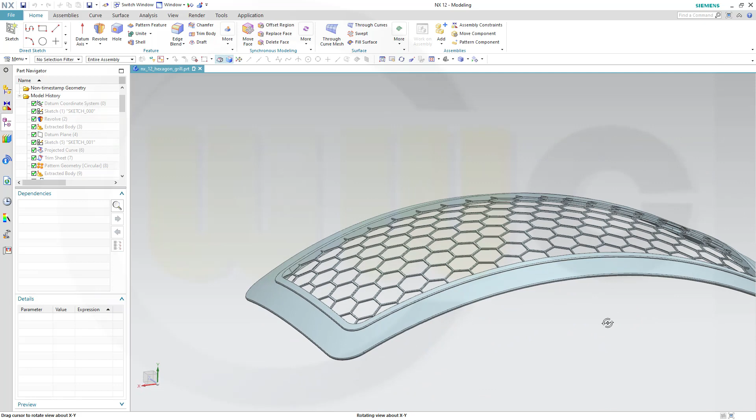I want to do that hexagon grill now in Siemens NX, which went very well, very sort of easy to do. And please note, those hexagons have all the same size, but those ribs between those hexagons are not equally sized, because you cannot cover a sphere with equally sized hexagons. But let's have fun with Siemens NX.

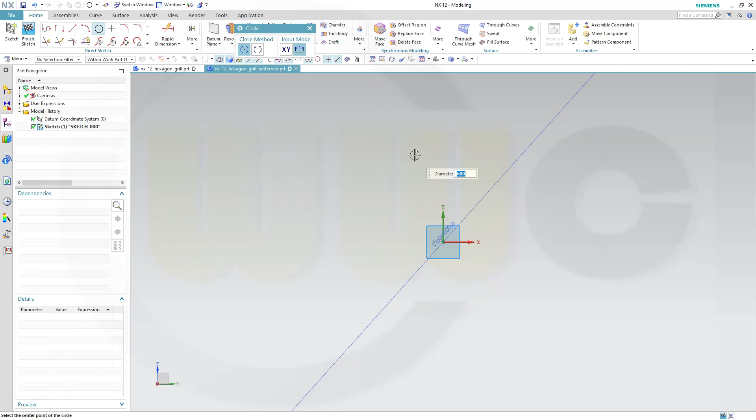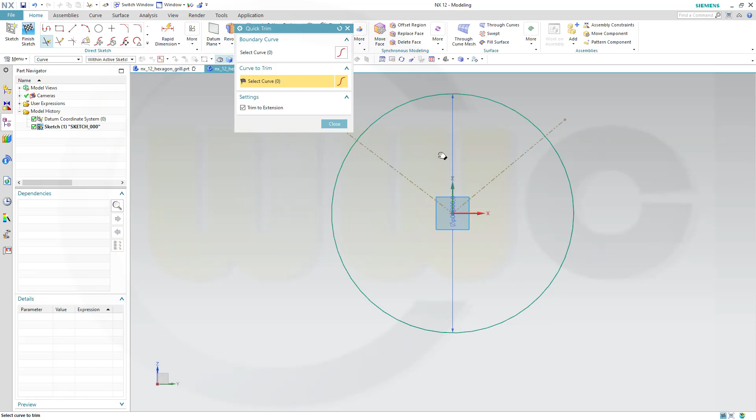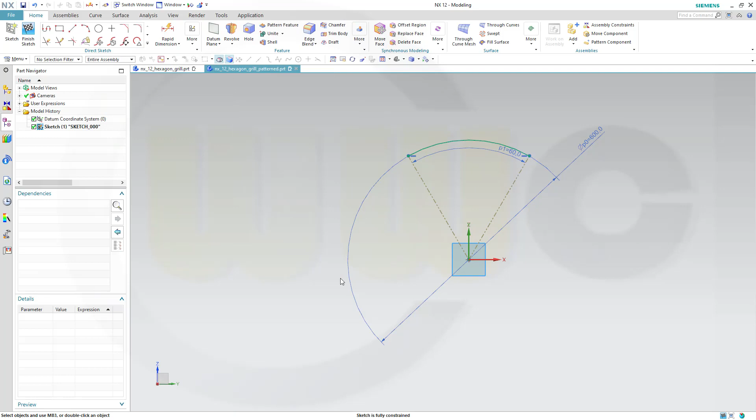Okay, let's start with a sketch on the YZ plane, this one. Okay, I need a circle. Diameter could be 600. And okay, now I need some lines to trim. Okay, make those two for construction only. Trim. Close, arrange those 2 points horizontal and give it a dimension, and that might be, let's say, 60 degrees or 80 degrees, one way or the other.

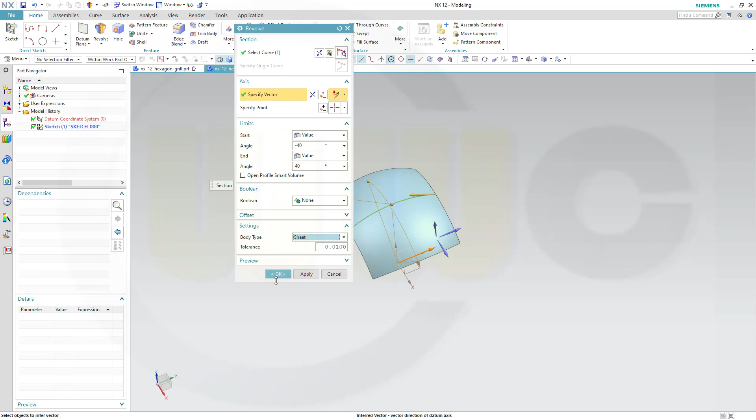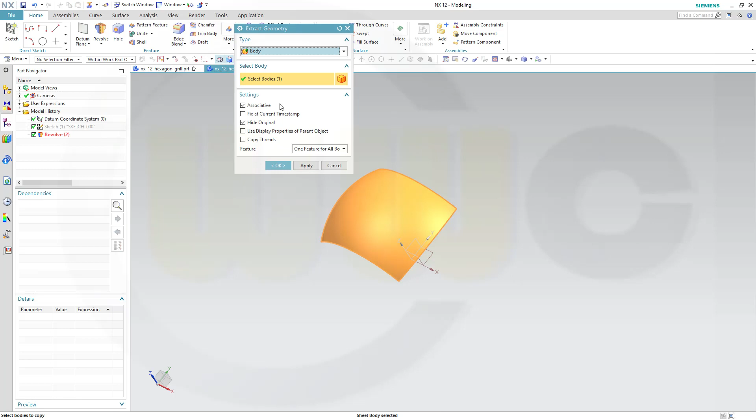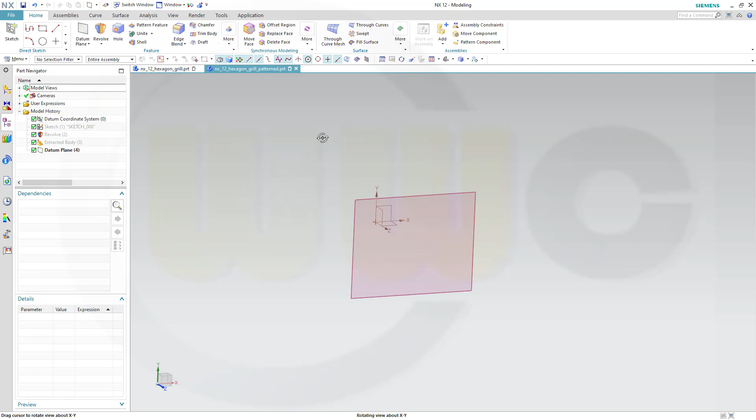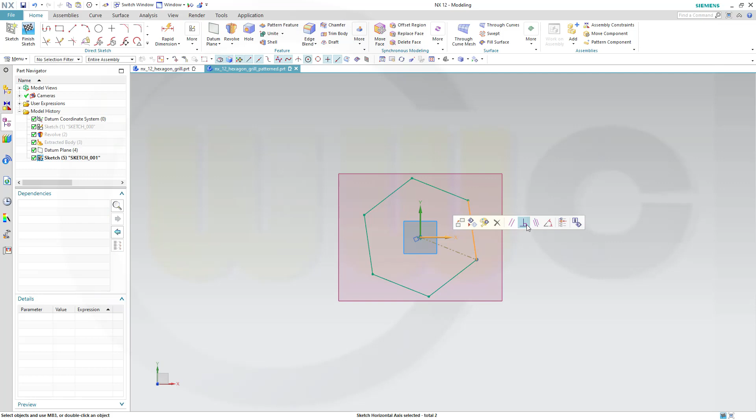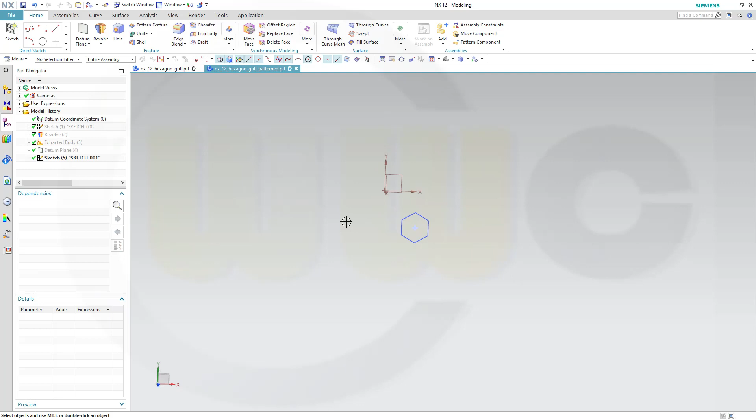Let's go for a sketch, maybe hide that extracted surface for the moment. Go to that plane, confirm. I need a hexagon, maybe like that. Close, arrange that line and that axis perpendicular, and give it a dimension of maybe 10. Close, let's zoom in. Okay. Finish that sketch and hide that plane for the moment. Bring back our extracted surface.

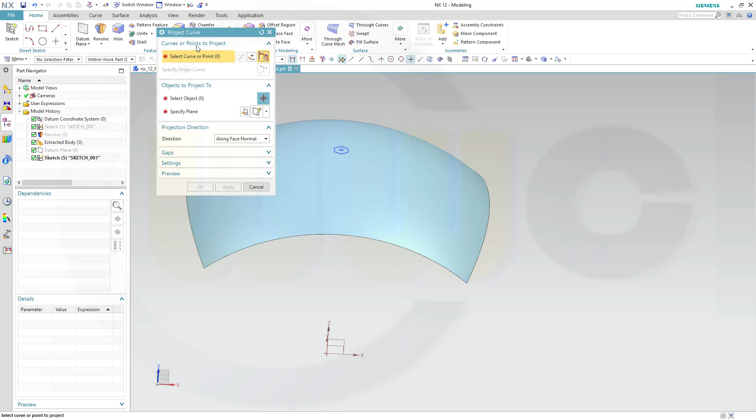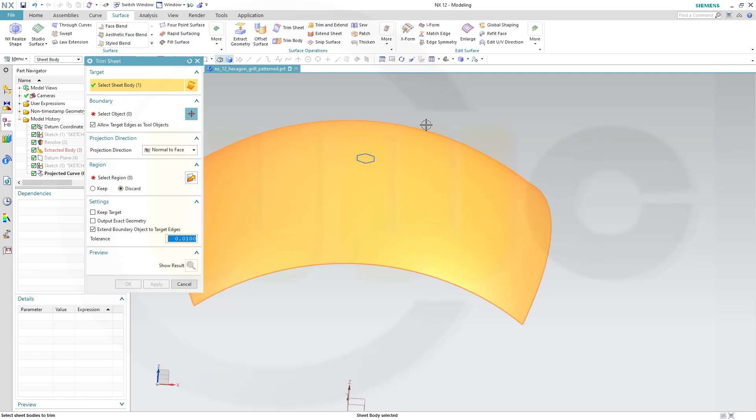Now I want to project this hexagon onto that surface, so go for Menu, Insert, Derived Curve, and I want to project that sketch onto this object along face normal, and OK. Now let's hide the sketch and trim that surface. Go for a trim sheet. I want to remove that, and that's the target, and this is the boundary, and it's discard, so it should work nice. Now I want to pattern this one.

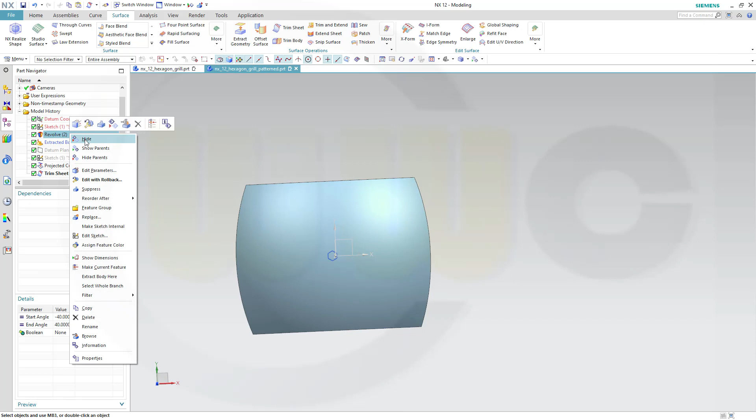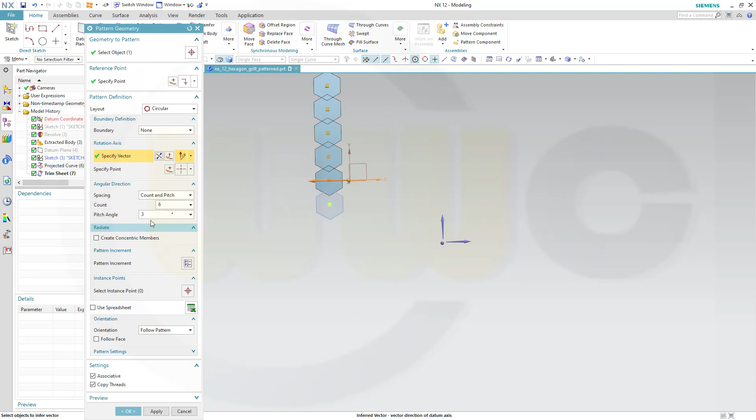Let's bring back our original surface just to see. Yeah, that's okay. Hide. I want to pattern it. So go for Home, More, Pattern Geometry. I want to pattern this geometry around the x-axis. Turn it around. I want to go for 6 and 3 degrees distance, but now I can clock those instances, and that's a great feature.

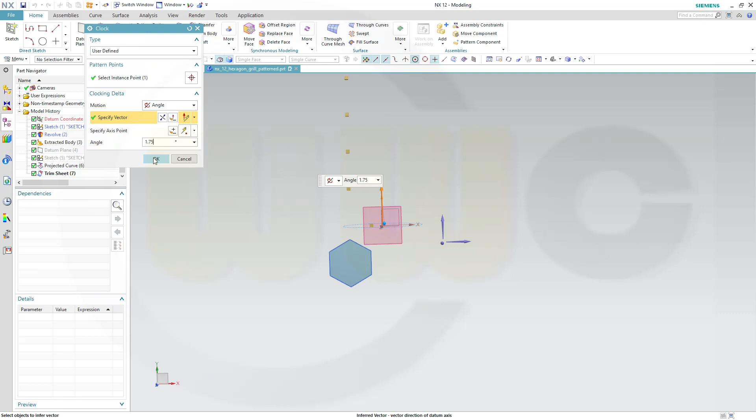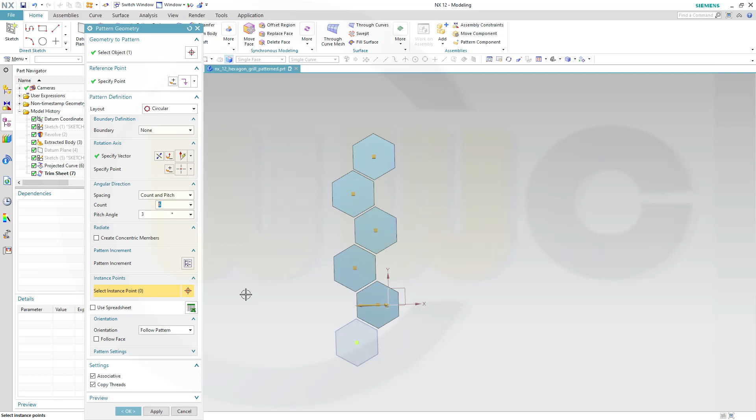User defined, go for an angle around the y-axis and make it 1.75 degrees. Okay, then clock this one again, user defined, again an angle around this axis, again 1.75. Okay, and the last one, clock, user defined, go for an angle, select the axis, again 1.75 degrees, and confirm. That's really nice.

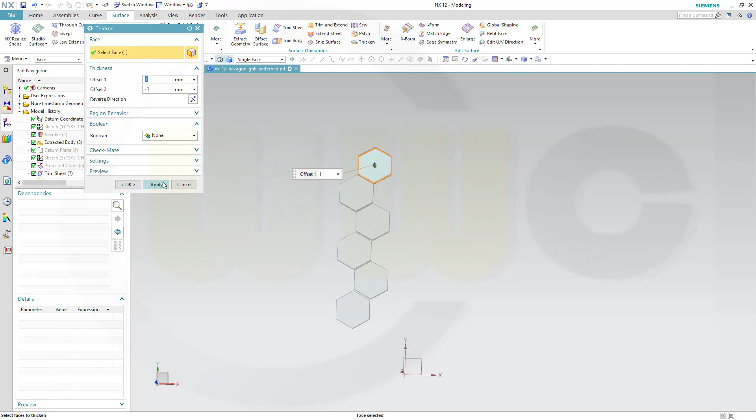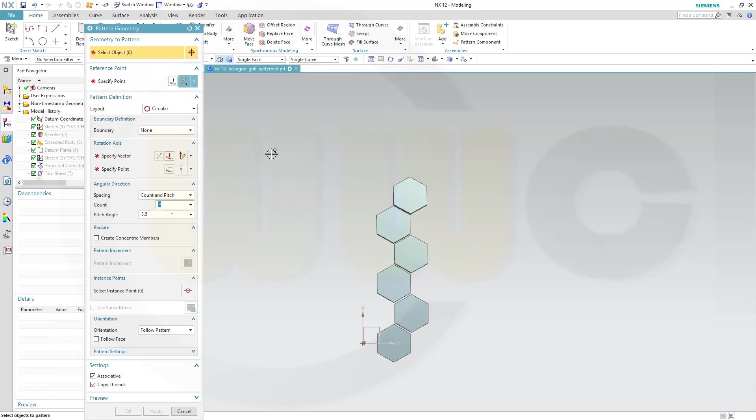Now let's thicken those surfaces. So go to thicken, I want to go for 1 and -1 millimeter. First one apply, second one apply, third one apply, fourth one apply, fifth one and sixth one. Okay. Now let's hide those sheet bodies. Okay. And let's do a pattern. So go for home, more, geometry pattern. And I want to pattern those bodies. 6. Vector should be the y-axis. 9 instances with 3.5 pitch angle. And okay.

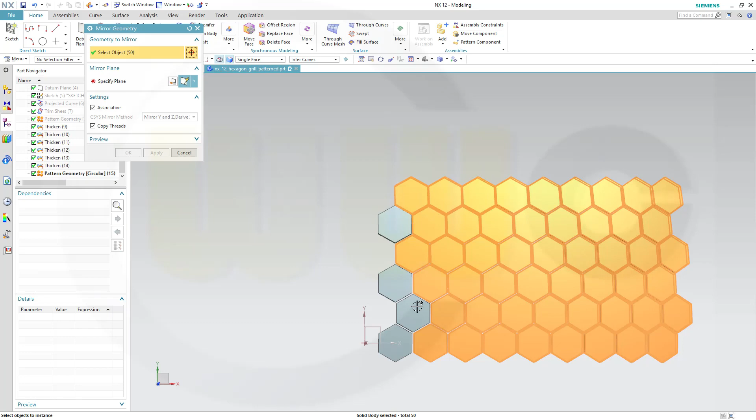Then I want to mirror that. So go for more, mirror geometry. Select the pattern. And those should be mirrored as well. The plane would be, of course, the ZY plane. And apply.

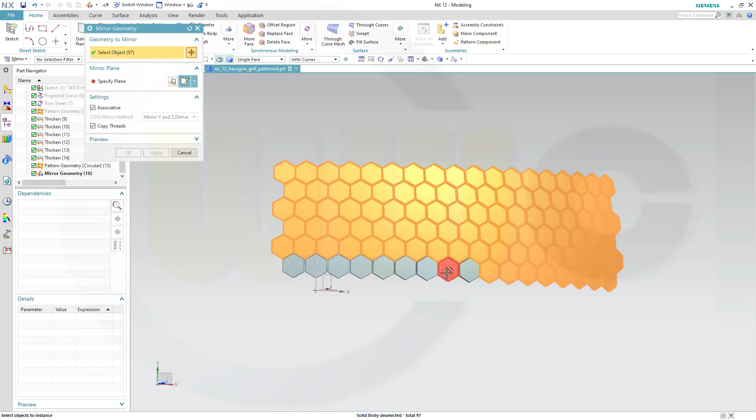And now mirror the pattern and the mirror geometry. This one, that one, this one, that one, this one, but not this one. And all those in the middle. And the plane would be, in this case, the ZX plane. And okay. Great.

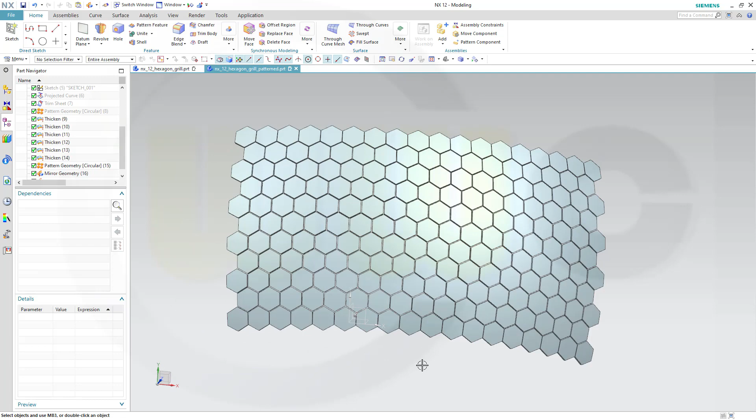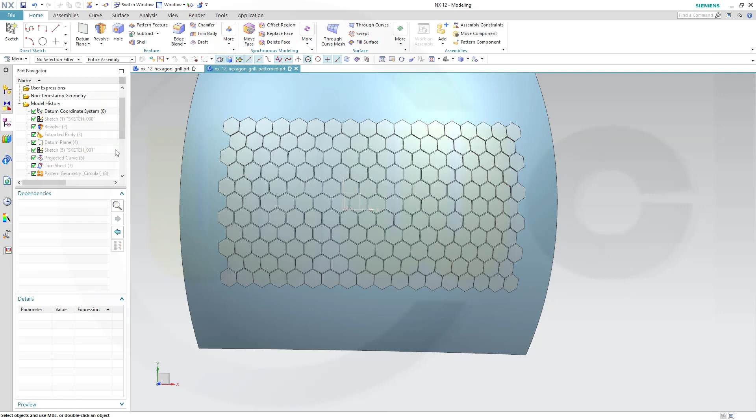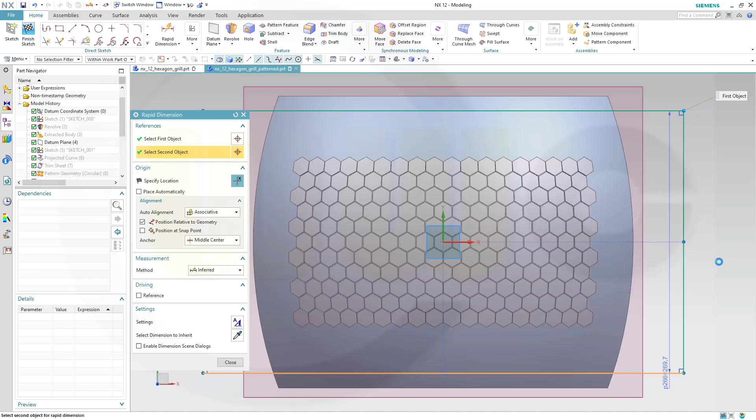That's nice. Okay, now I need another copy of my revolve, so we'll go for an extract geometry, but fix it at the current timestamp and confirm. Okay, now I need a sketch on that plane. So show it and go for a sketch right on this plane. Okay, that would be a rectangle, a centered one. Okay, maybe like that. Add some dimensions. This could be, let's see, 160, and that distance might be 300, or yeah, I will have to change it afterwards anyway.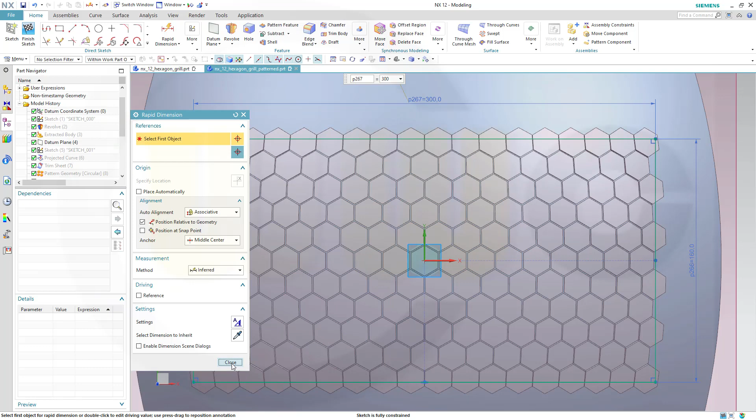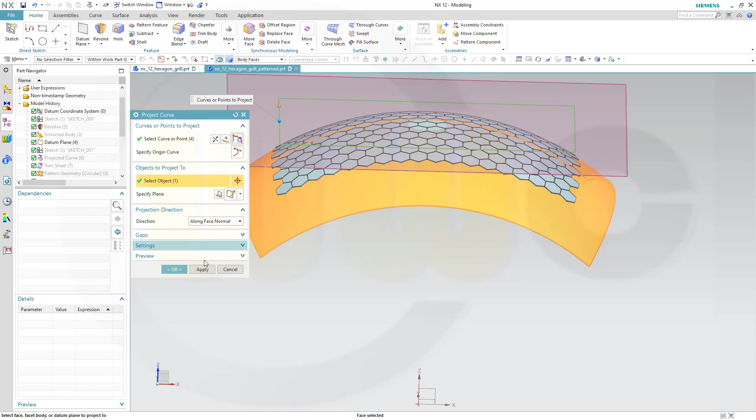Okay, finish that sketch, and let's project that sketch onto that surface. So go for menu, insert, where's my project derived curve, project that sketch onto the surface and OK. So that projected curve looks like this at the moment. Yeah. Now let's trim. So go for surface, trim sheet. I want to trim this sheet with that projected curve and confirm.

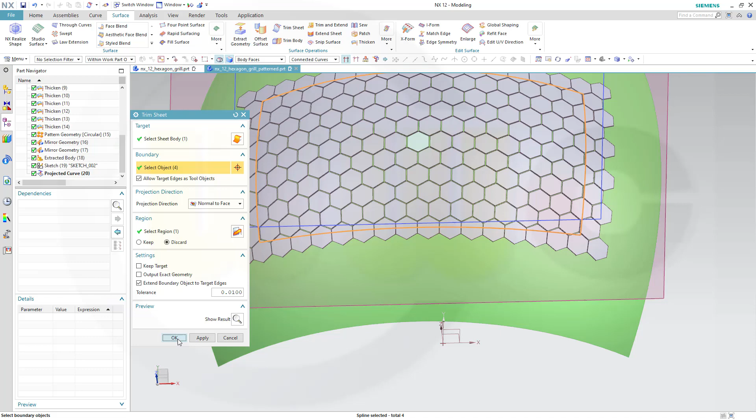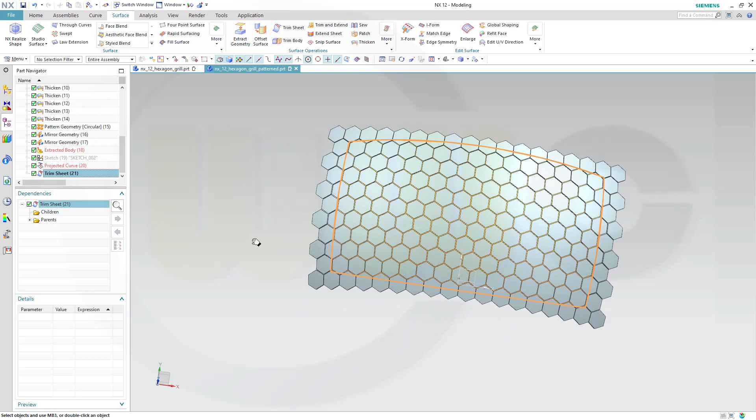Let's hide that one. And hide the sketch. And let's see where this sheet is right now. So I might change, let's see, that value a little bit. Yeah, maybe let's change that sketch from 300 to 320 and see how this looks.

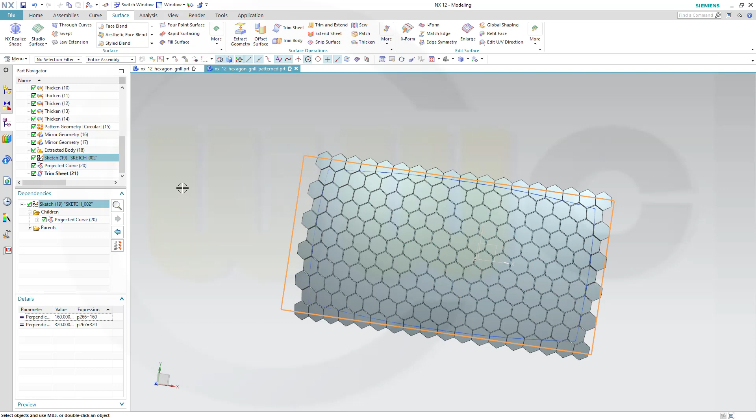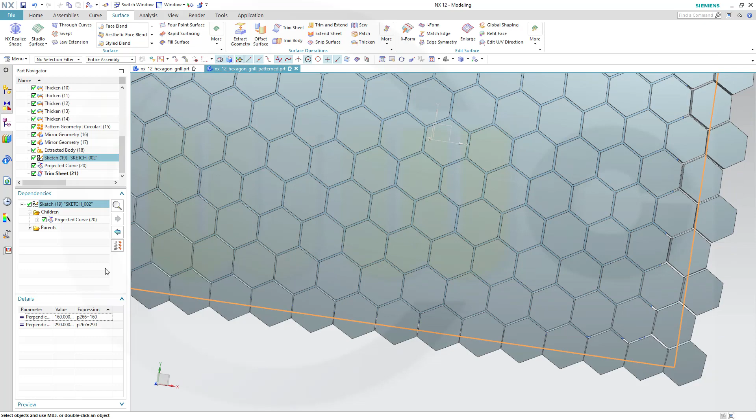So that trim sheet right now, let's take a closer look. So that's right on that center, that's no good. So let's change it to, let's say, 290. And take another look. That's, I think, a little bit better. Now I want to thicken that trim sheet, so this should be thickened 0.5 and minus 0.5. This one, and OK.

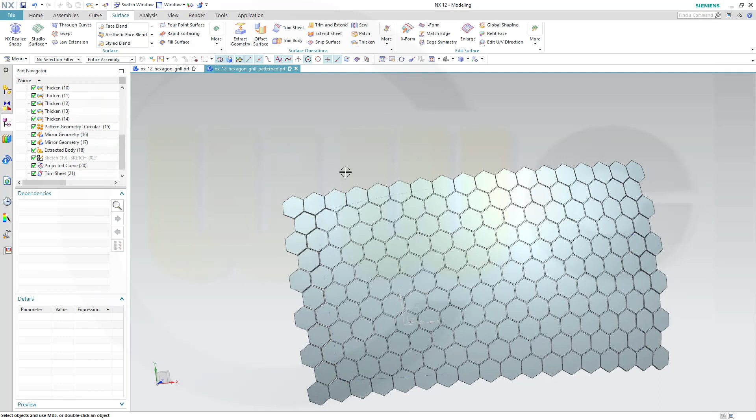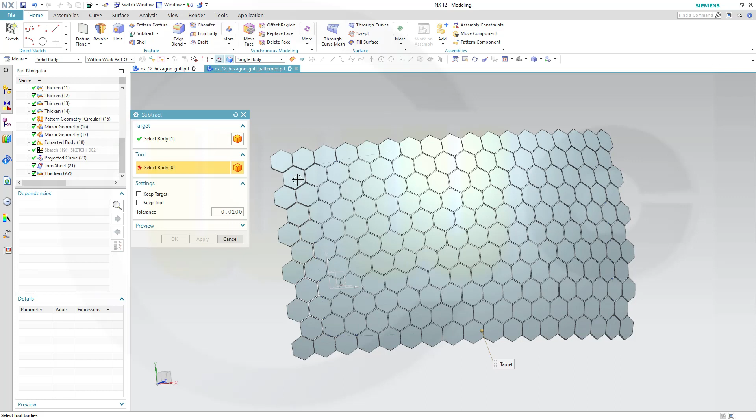Now let's see if we go for a subtract. I want to subtract from that thickened one the other ones. So let's go for a solid body and single body. That's kind of odd. Can I go for a selection here, or maybe, just maybe, first arrange it like that and then go for the subtract this one, and I want to remove, let's select it like this.

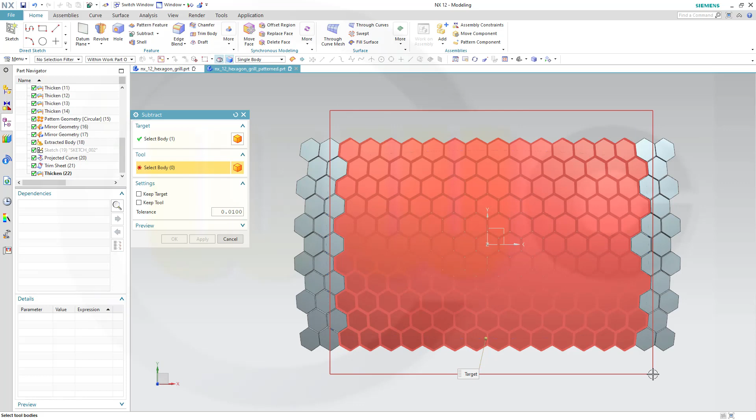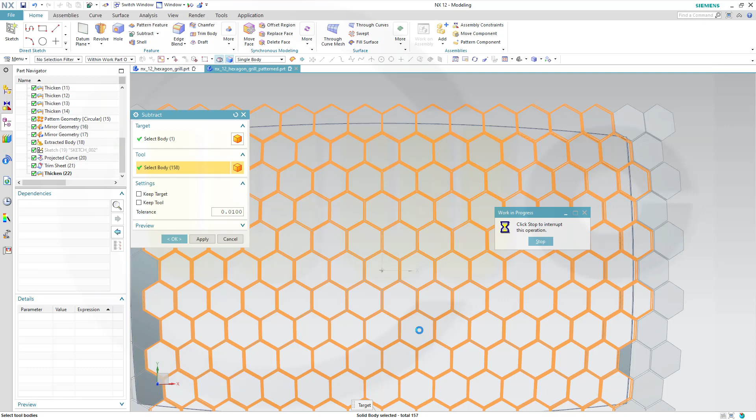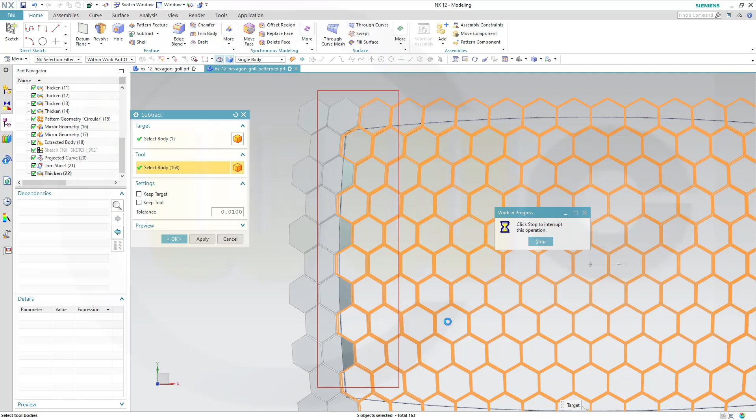Let's see, that's okay. So I have to add this one, and those, okay, and on the other side let's try to select them all together like that. Takes a while, so these are still not selected. Let's try once more like this. I don't want to select too many, so let's take a closer look.

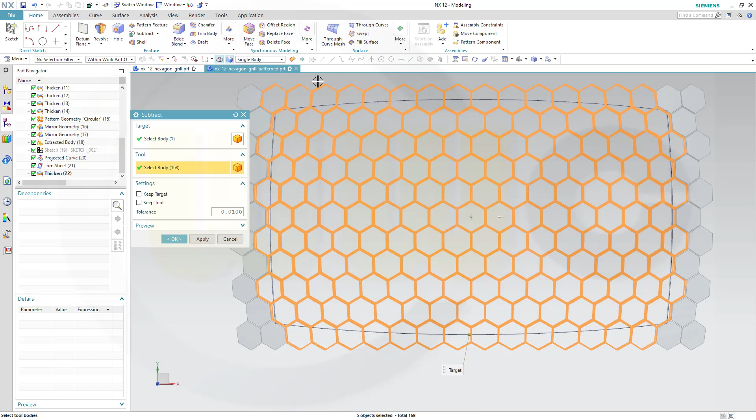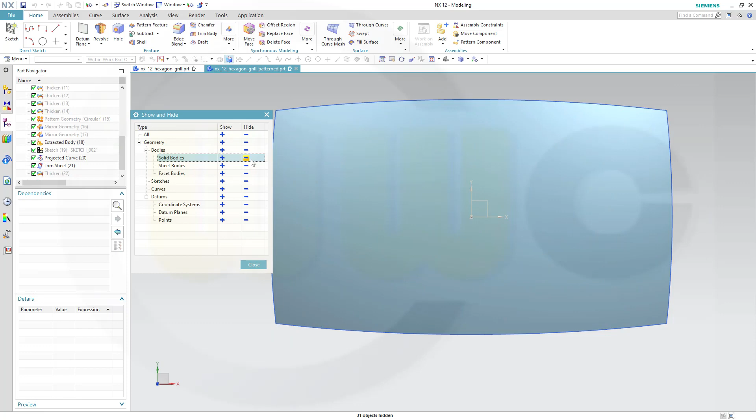So that's okay, and should I maybe deselect this one so it's more symmetric? Yeah, and okay. Now maybe let's hide all bodies and bring back just the one. That would be this one, and okay. Yeah, hide them once more.

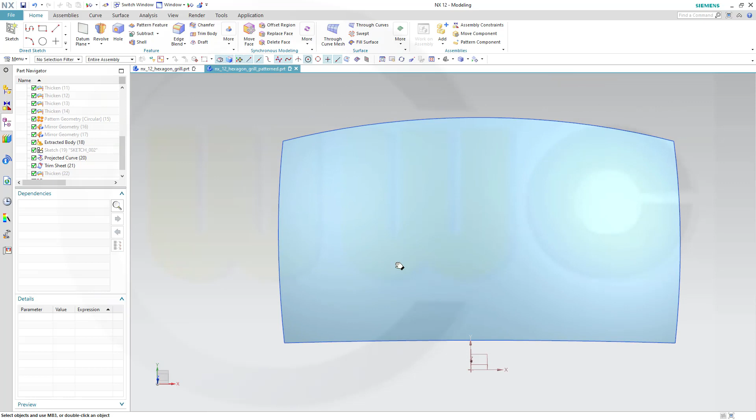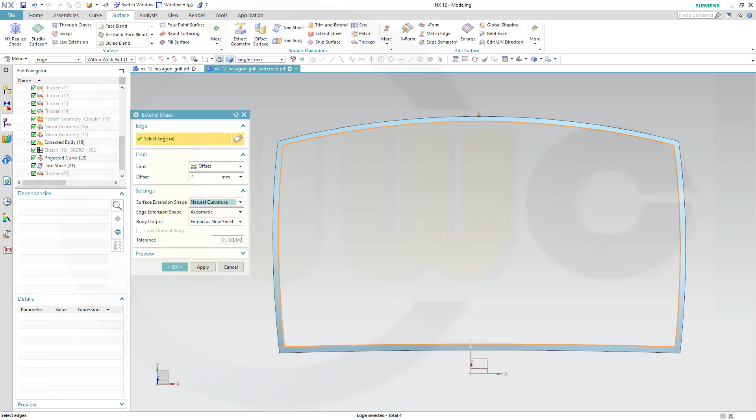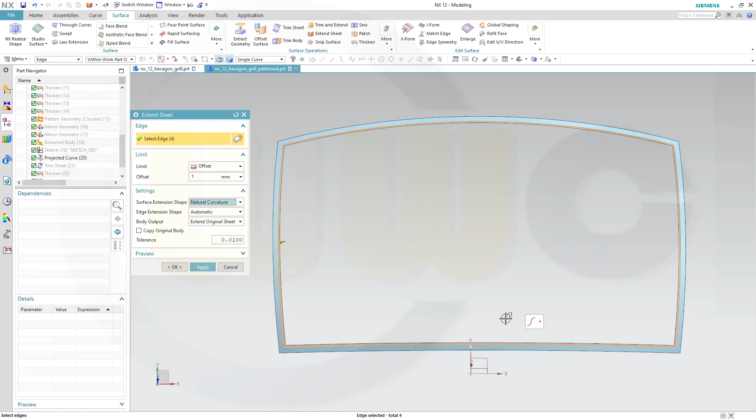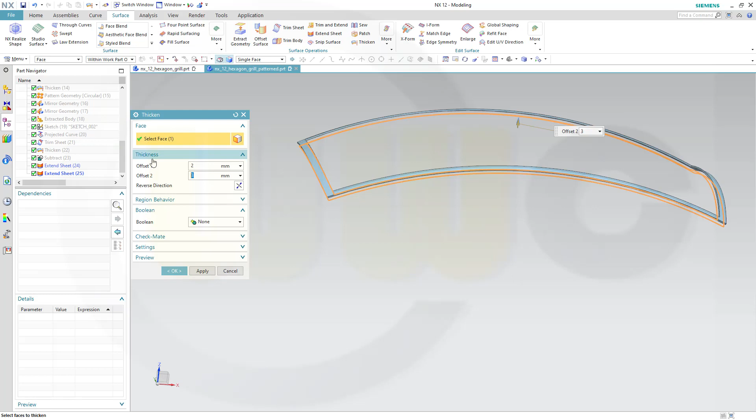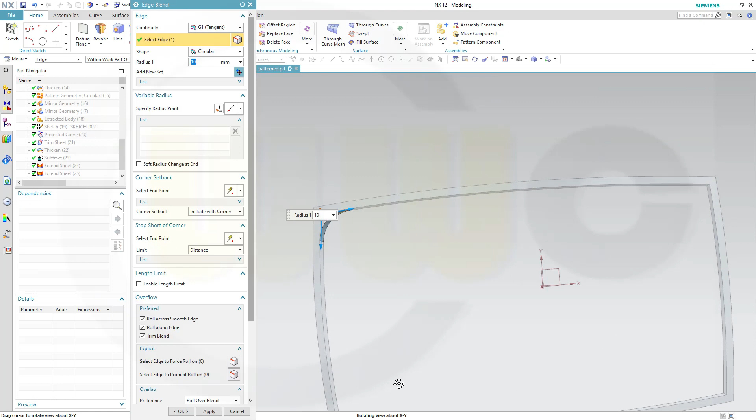Now let's hide that projected curve and thicken that. So go for thicken, make it maybe 2 up and 3 down, -3 of course, like that, and okay. Hide the sheet, make some fillets, go for edge blend, go for 10 on the inside, here, there, up here and down there.

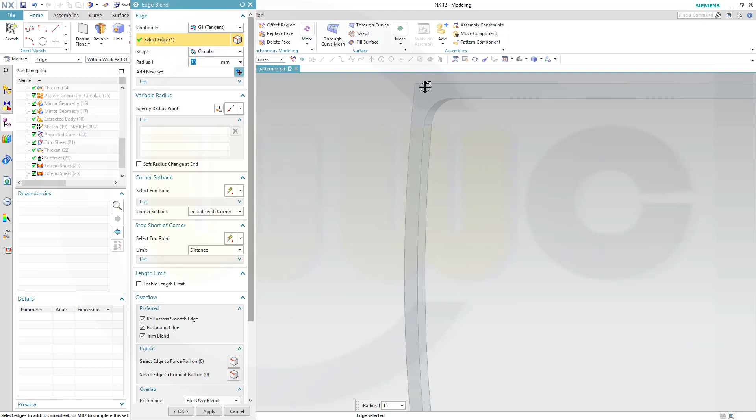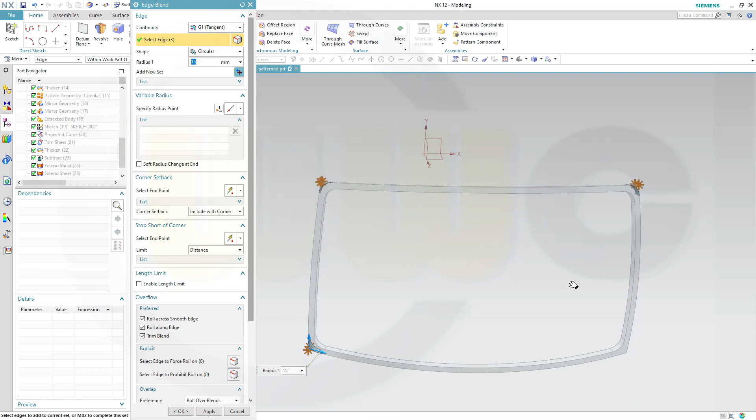Apply, go for 15 on the outside, here, no, can't select it really. This one, and that one, and this one. Okay, looks okay. Maybe bring back that solid just to take a look. Looks pretty good. Now let's bring back that sheet,

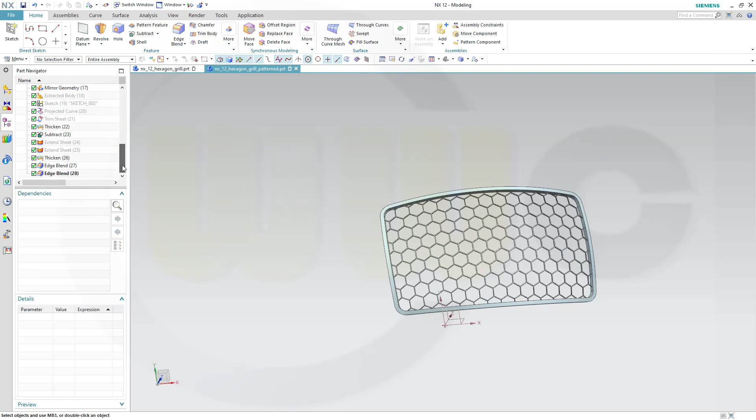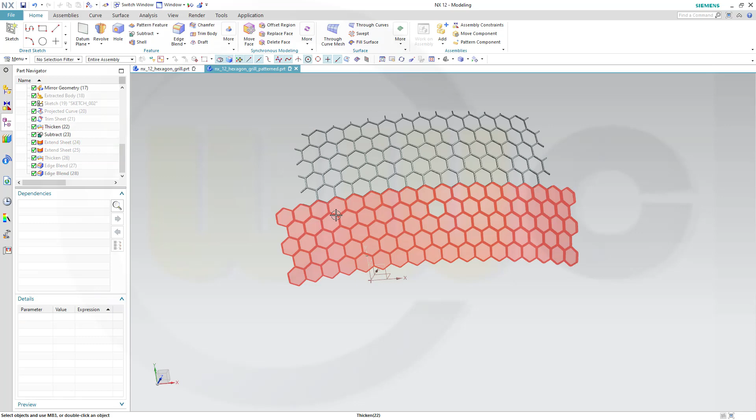and that was the small one, this one. Is the selection filter on? No, I need just that small sheet, or is it still here? So if I hide that body, hide that body, and I need a sheet, and that would be that extended sheet, this one. So show it.

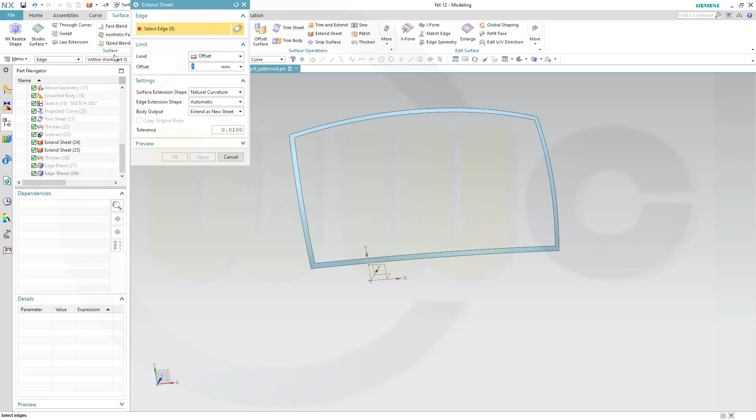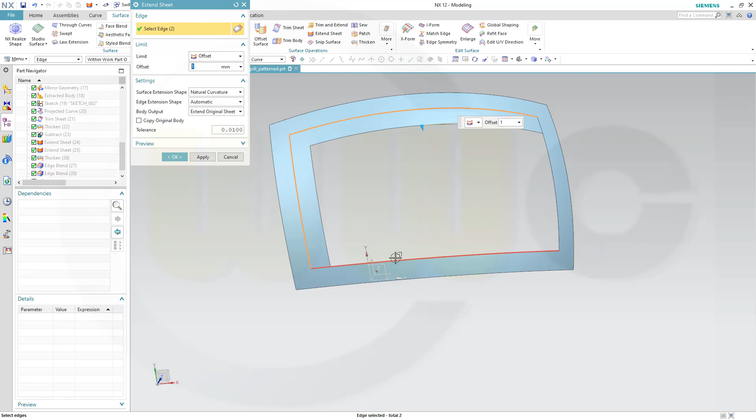Now extend it again, make it a new one, make it, let's say, 20, here, here, over here and there, and confirm. Hide that one and make it 1 mm to the inside. Extend, go for original one, make it 1 mm. The previous is wrong, that's more like it. Confirm, and now thicken this one with 1 mm up and 1 mm down. Thicken that surface, 1 and -1.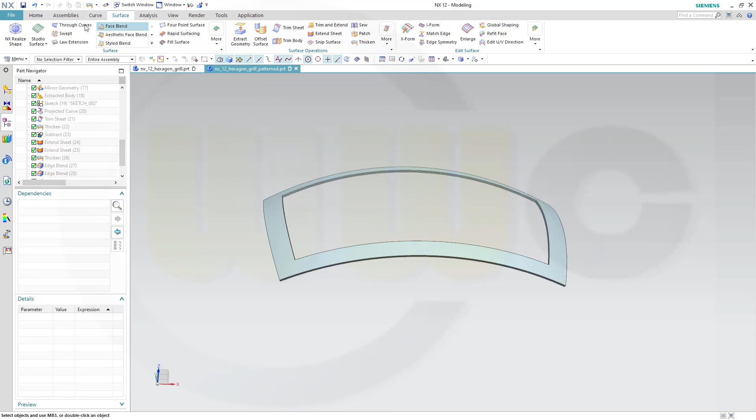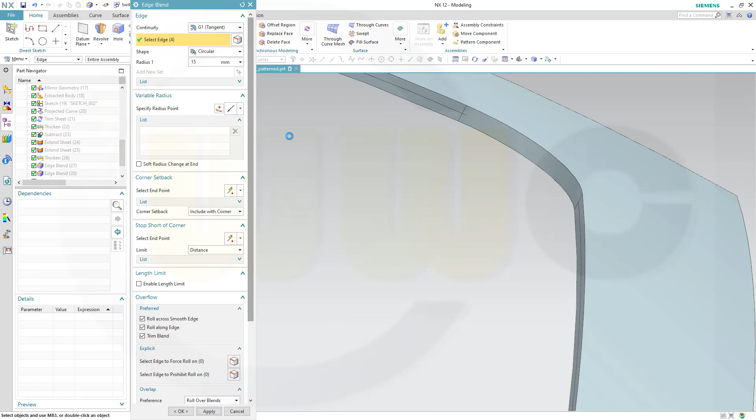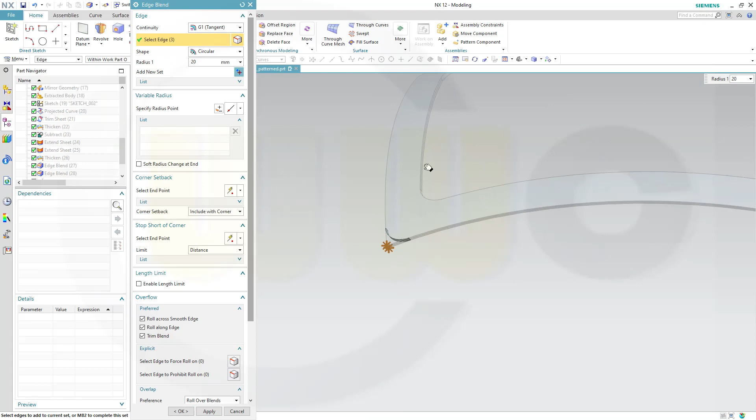Confirm. Let's add edge blends, 15 mm on the inside. Here, there if possible, yes. Here and over there. Apply, and 20 mm up here on this edge. No, that's wrong. On this edge, and that one, and this one, and okay.

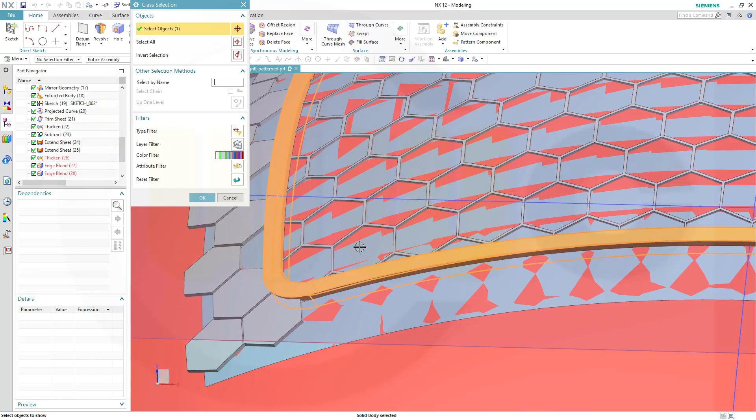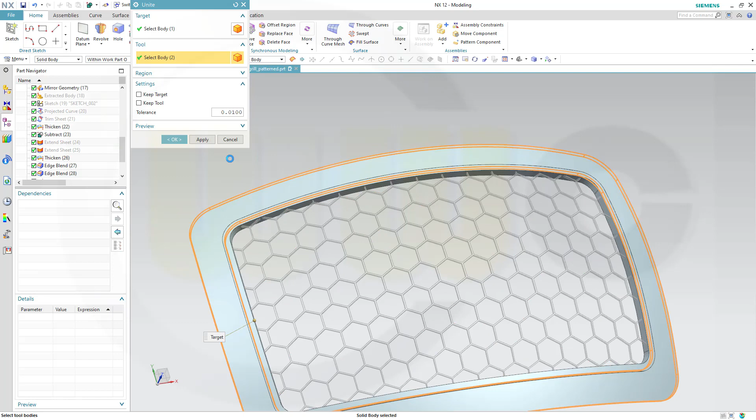Now let's bring back, hide the sheets at first and bring back those bodies. That would be this body right here, that one, and of course this one. Okay, close. Let's take a look. Looks pretty good. Let's go for a unite. I want to unite this one with that one and this one, and okay.

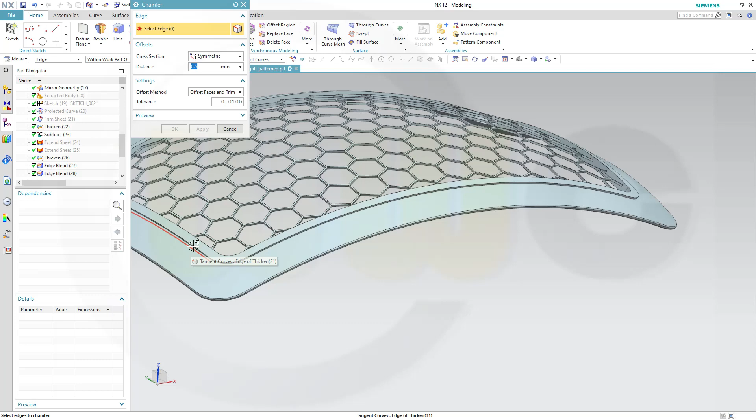I'm almost done. I want to add some chamfers, so go for 0.5 on this edge, apply, that edge, apply, and maybe on this one as well. Okay, and I'm done.